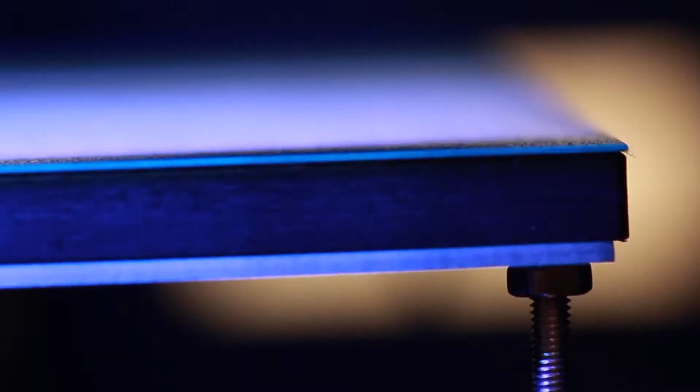One of the really nice features of Simplify3D is it allows you to run different settings for different parts of your print. This means you could have multiple different models on your print bed at the same time, each with their own settings, or you could have different settings within a model itself, depending on the area of the model and what properties you want that area to have. So let's take a look at the different types of multiple processes you can use.

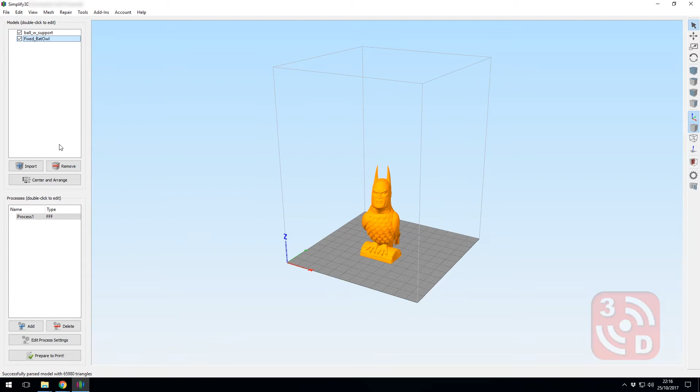One of the really cool things you can do with multiple processes in Simplify3D is print multiple models at the same time, each with their own settings. If I import a couple of models now, let's go for this one and that one there. So let me move these out so we can see them better. On the right there you can see we've got Batman Owl, and on the left here we have a ping pong ball that you print in place. I've actually used that before and I was impressed how long it lasted. I got through a few games.

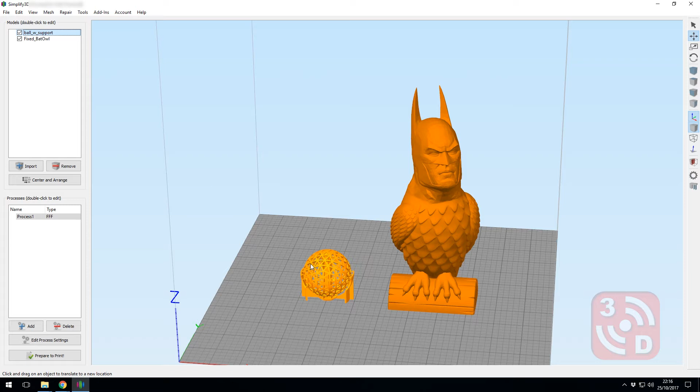Now the one on the left here, the ping pong ball, I'm going to want to print at 100% infill to keep it nice and strong, and I want it to be high resolution, so I'm going to print that at 1 micron. The Batman Owl though, I don't want it to take ages to print, so I'm going to print it at a lot lower infill, and I'm also going to print it at 2 micron layer heights.

So to do this, we're going to have to add an additional process. If I select this process we've already got, you'll see it selects both models at the same time. That's because they're both within it. If I now create another process, you can see it's appeared there, and go to select models, you'll see it's got both of them highlighted here.

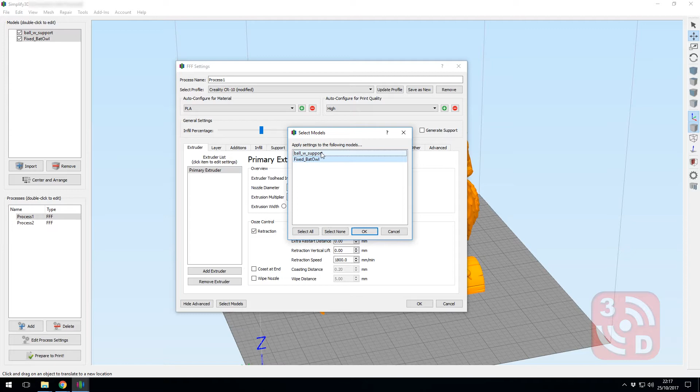If I unhighlight one model and click OK, and then go into the other process, click edit process settings and go select models again, if I unselect the bat on this one and click OK, you'll now see that if I select the first one, it just highlights the bat. If I select just the second process, it just selects the ball. This shows that the processes are only applying to those individual models.

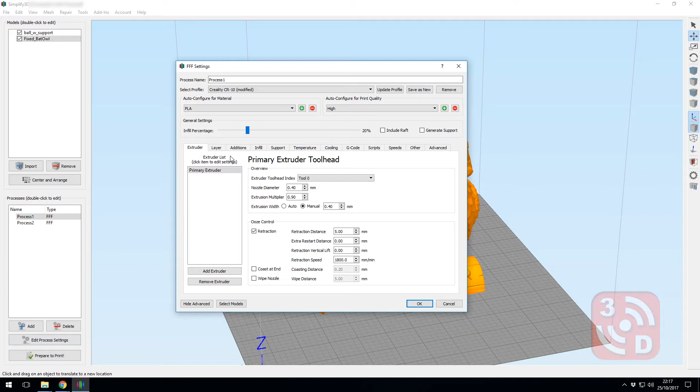So now if I go and edit the settings just for the bat, I can change this to, let's go for 20% infill. And I'm going to select the 2 micron layer height that I wanted for that. And I'm actually going to speed it up a bit because I don't want it to take too long and I'm not that fussed about the quality on that one, so let's just hit OK.

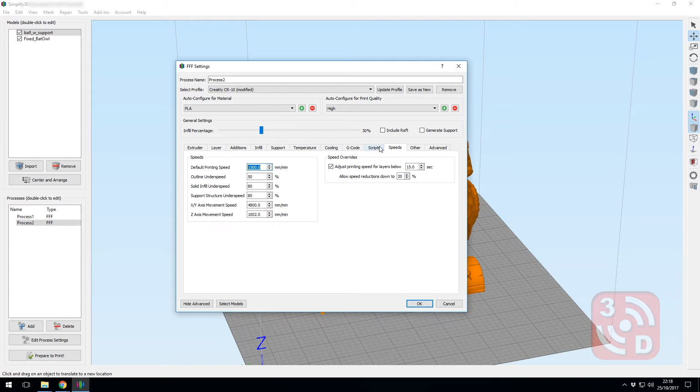On the ping pong ball, I want that to be nice and tough, and I kind of want it to look nice. It's quite a fine detail anyway, so we want a quite a small layer resolution. Let's keep that at 1, and let's slow it down a bit so it gives it time to cool on each of those thinner areas. I'm also going to increase the infill up to 100%, and now I can click OK.

We're now ready to click Prepare to Print. When I do this, you'll notice this box appears. This is asking which of the processes I actually want to print. If you just select the one, it's only going to select and recognize that one print. We want to select all, so it recognizes them both in the next stage.

Down here, we've got the choice of either continuous printing, layer by layer, which will print both models at the same time, layer by layer. The other option is sequential printing, and this will print one entire object and then move back to the bottom and start again. This can cause major problems, and you always want continuous printing. Let's click OK.

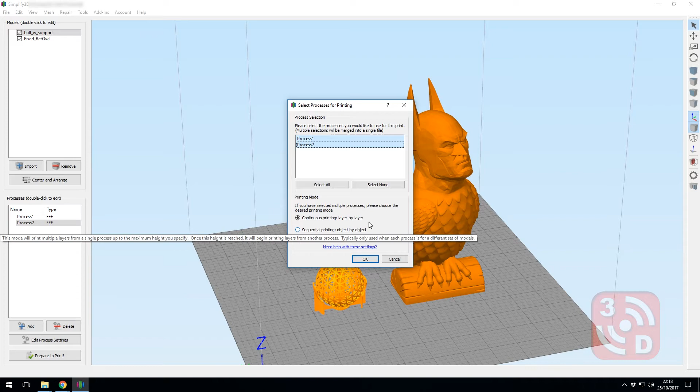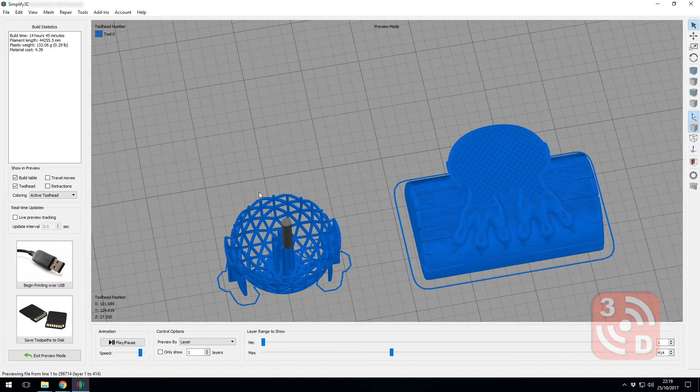Once that's complete, we can see both models have come out on the build plate together. All good so far, so now let's take a look and see if our settings have come out how we want them. If I scroll down through the layers, you'll see our Batman Owl has come out with the infill I've selected. As I keep going down, the ping pong ball doesn't really show it as well as it could have. That is technically 100%, but because of the size of the parts, it's actually pretty hollow anyway.

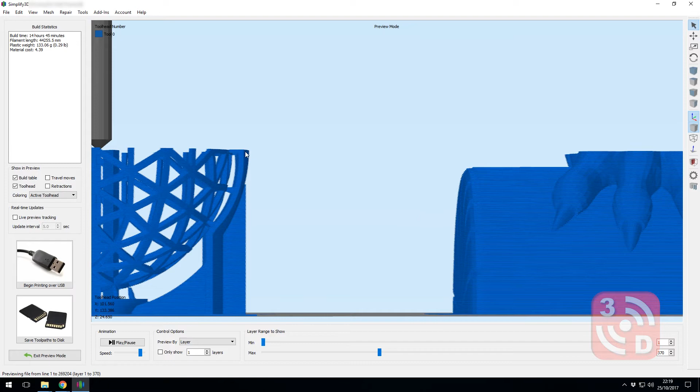It's pretty much just the outer walls. A better example is if I look at the lower layers on a more front-on view, we can look at the layer heights. The ping pong ball on the left has a 0.1mm layer height, and the owl has a 0.2mm layer height. And that is using multiple processes for multiple models.

Another really cool way you can use multiple processes in Simplify3D is when you're printing just one model. You can actually set different settings for different areas of the same model. You could use this, for example, to have 100% infill on a base, so it's nice and heavy and bottom weighted, but have the rest at a much lower infill to save time and materials whilst printing. You could also use this for strengthening certain areas of a print that you know are going to receive more strain, or changing the resolution where it matters.

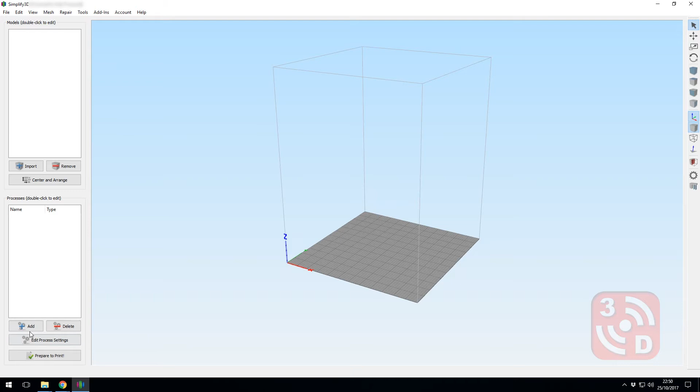So let's add a new process, and click OK. Let's import a model so we can play with it, and this is probably something you guys will recognize. What I'll do with this is have one setting up to the neck and another just for the head, and this will allow us to clearly see the differences between the settings we've applied.

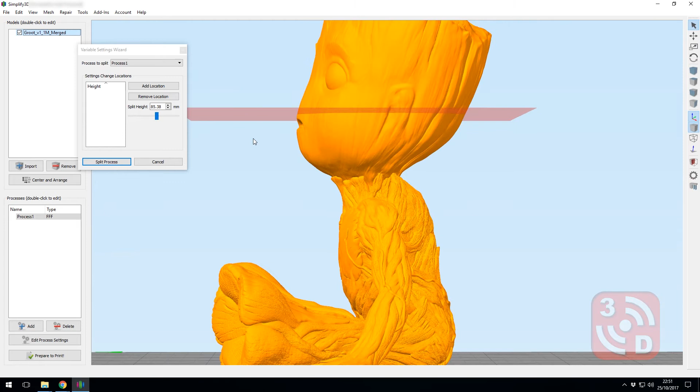Now if we come up to Tools and down to Variable Settings Wizard, you'll see this plane appears around the model. You can drag this up and down, and this is the point at which the print is going to change the settings being applied. So if I slide this to just about where the neck comes into play and click Add Location, you'll see the exact layer height appears there, and it's from this point the printer is going to change what settings are applied.

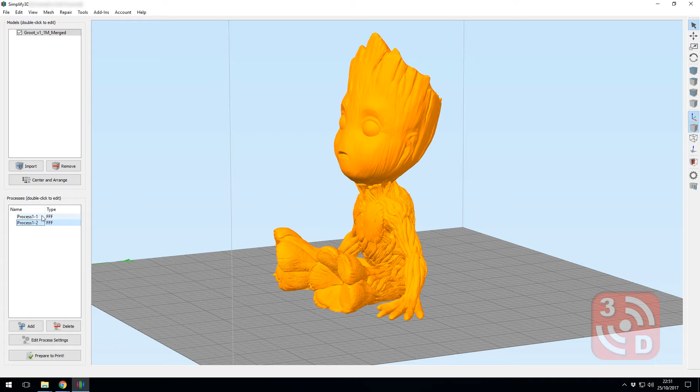Let's click Split Process. You'll now notice another process has been selected down the bottom. This is a copy of the original one, but applied to a different part of the body. So the first one is applied from the bottom up to the first marker. I'm going to leave that at 100% infill and a layer height of 0.1.

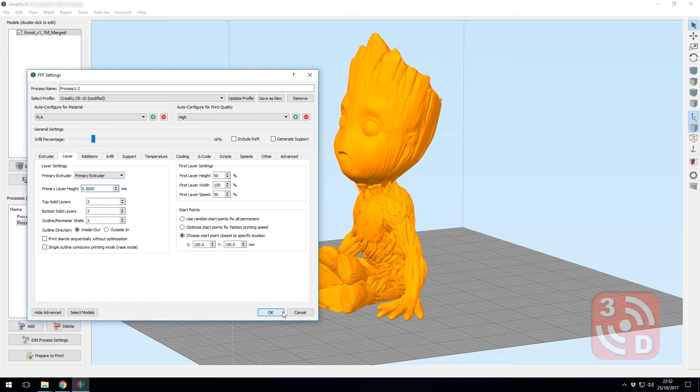I'll select the second process, which is just for the head. I'm going to bring this down to 16% and let's go for a layer height of 0.2. This basically means that when it hits that marker point I've set, it's going to change to process 2. So for processing, you again have to select both processes here and layer-by-layer continuous printing for this to print the entire model. If we click OK and let that process, we'll see how this comes out.

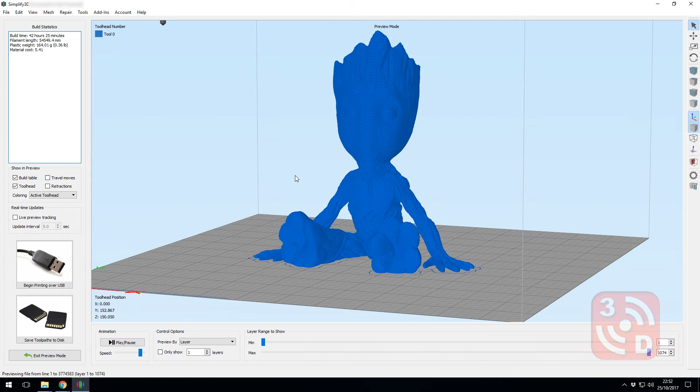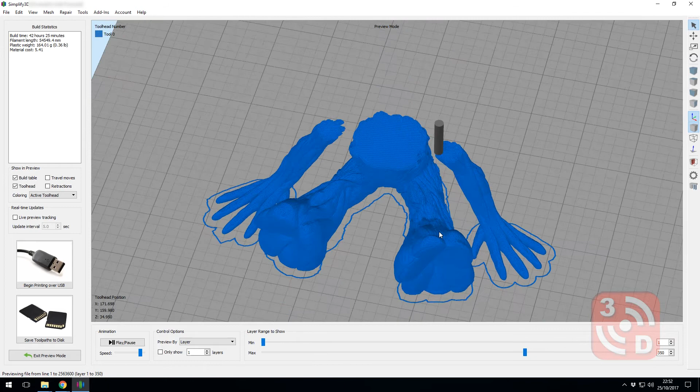Okay, and now it's finished processing, so all looks good from here. If we zoom in closer, you may start to notice the difference in settings. It's actually quite clear on this one, and you can see the exact point where it goes from 0.1mm layer height to 0.2mm layer height on the head there. If I start scrolling down, you'll see it starts out printing at 100% infill, and as I scroll up, as it reaches the neck, we then go into the 16% infill that I selected. And that's how you select multiple processes for the same model.

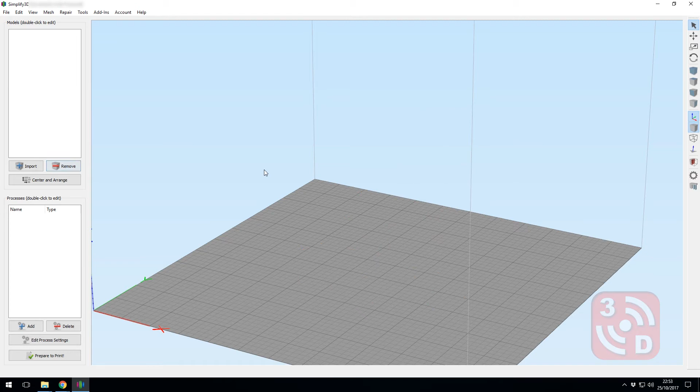Now one other thing I'd like to quickly show you here is if we go back, if we deleted both our processes and deleted our model, we're starting from scratch. If you've done one of these multiple process models and you start your next print, what you may find is if you just go ahead and keep your process settings, it comes out like this, and it's only printing part of your model.

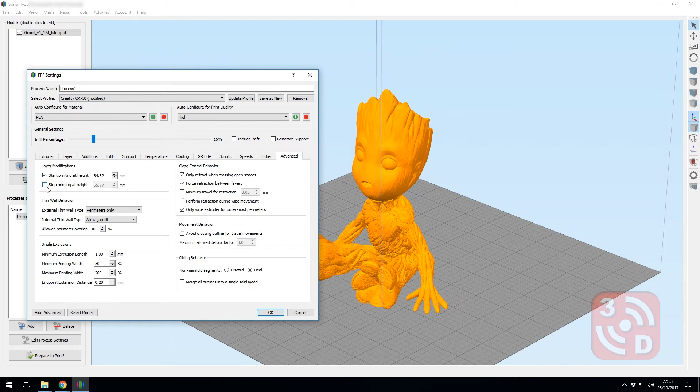The reason for this is Simplify3D remembers your previous settings. If you go to Advanced, you'll find that either the Start Printing at Height or Stop Printing at Height boxes are ticked. Untick them and click OK, and now you should be able to prepare to print and it will include the entire model. It's worth noting, if you've just started experimenting with multiple processes, you may experience this and it can be very frustrating if you don't know what's going on.

If you have a dual or even a quad extruder printer, you can use multiple processes to print multiple materials, either in one or multiple models. You could use this for printing a solid infill with a rubberized exterior of a ball, or a rubberized hinge, or you might want to print one model in one filament and another in a different one.

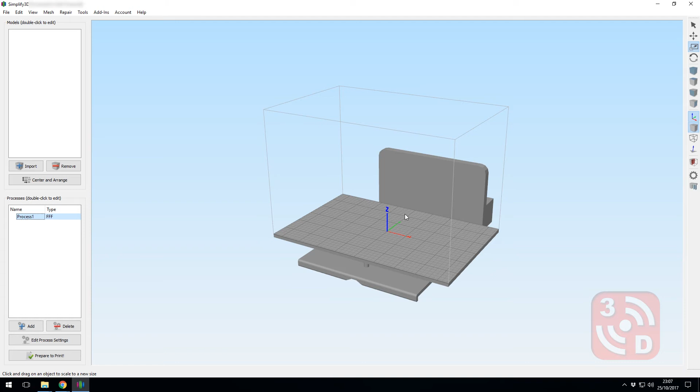But for this example, I'm going to show you what might be the most common use of dual extrusion, and that's to have a different material for your support structure. So if we import a model, here we've got a familiar character, Rick. I'll scale him down so he fits in my print area. You can see here that this model will require some support material.

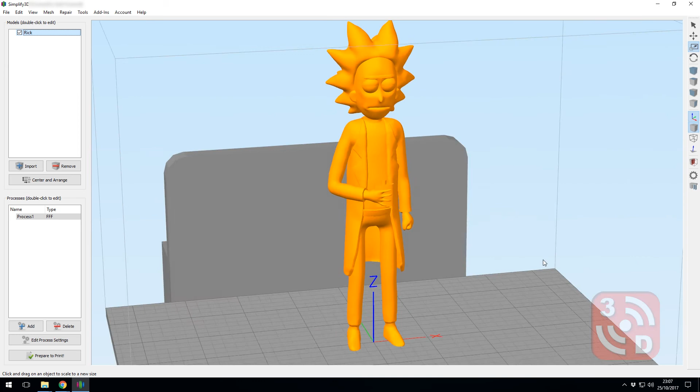I'm going to just use the general automatic support material for this because this isn't a support material tutorial, although keep an eye out, I am going to be doing a specialist one soon.

If we edit the process settings, if you have an auto configure set up for your printer, make sure both extruders are selected. Otherwise, in the list on the left, make sure both or all of your extruders are selected, and also that the tool head for that extruder is set up correctly. That will depend on your actual printer's setup. If not, you can add an extruder at the bottom of that column.

Now in Layer, this setting here is specifically referring to your exterior walls, your perimeter walls. I've set that to the left extruder, which in my current setup is PLA. Under additions, I'm going to keep skirt, brim and rafts turned on, but I'm going to set them all to come from the right extruder, which is my support material.

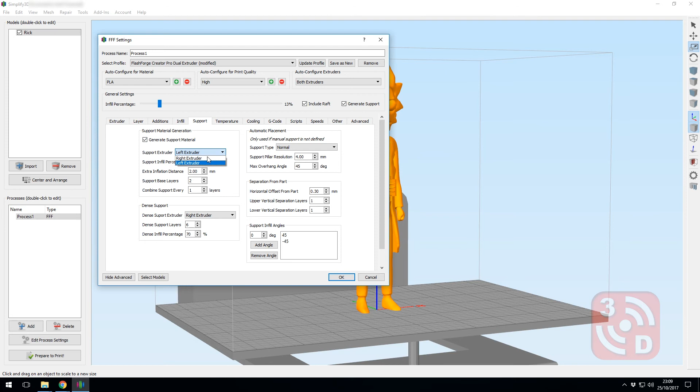Again, if I go to the infill, you'll notice that I can select a different filament again. I'm going to stick with the left, so both my infill and my perimeters are PLA, but my support material I'm again going to go to the right hand side, and that should allow me to easily remove it later on.

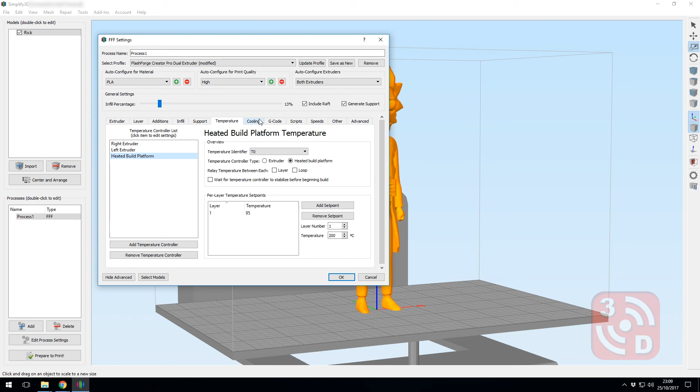Under temperatures, you're going to want to make sure that you've got the correct temperature set for each of your individual materials, as well as your print bed. Now your print bed is going to depend on whether you're using your support material or your main material for the base of the print, whether you're using raft or not, so take that into consideration. Your cooling and everything else can also be set as normal.

Your speeds can be changed for the different materials depending on what you've applied them to in this setting here. Now if I click prepare to print, you may find it doesn't look exactly as expected.

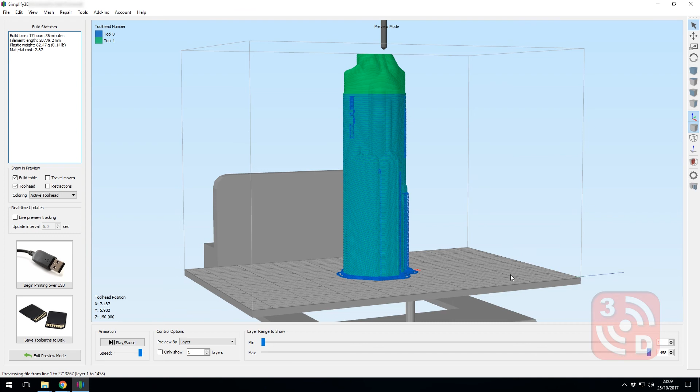Now what's happened here is Simplify3D has generated an ooze shield. It automatically applies this to anything that you're using with multiple materials, and this is basically a wall that it builds up to wipe the nozzle on as it goes and prevent stringing and deterioration of the quality of the print. Now if I scroll down, you can see the different materials appearing.

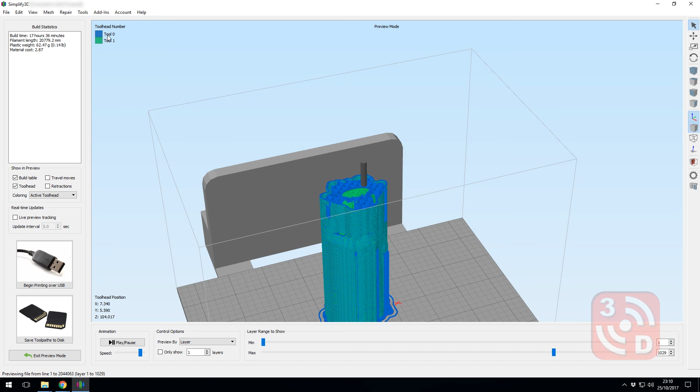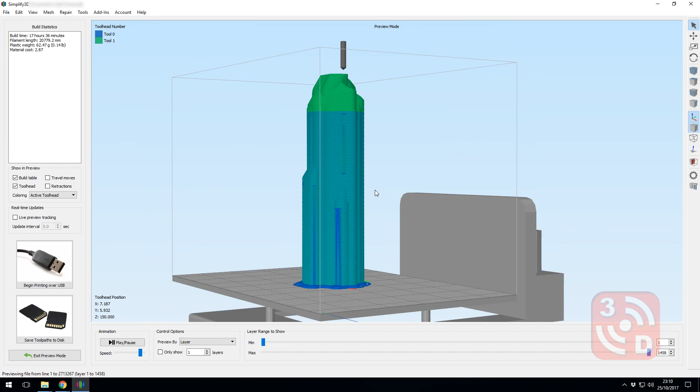You've got tool 0 and tool 1. Tool 0, represented by the dark blue, is my support material, and tool 1, which is my PLA, is represented by the green. You may also notice the different colours of the ooze shield itself. You can see it's more of a bluey green, and that's because it is a mix of the two materials, where it's wiping the nozzle in between each layer to make sure that nothing from the previous extrusion is dragged into the other material.